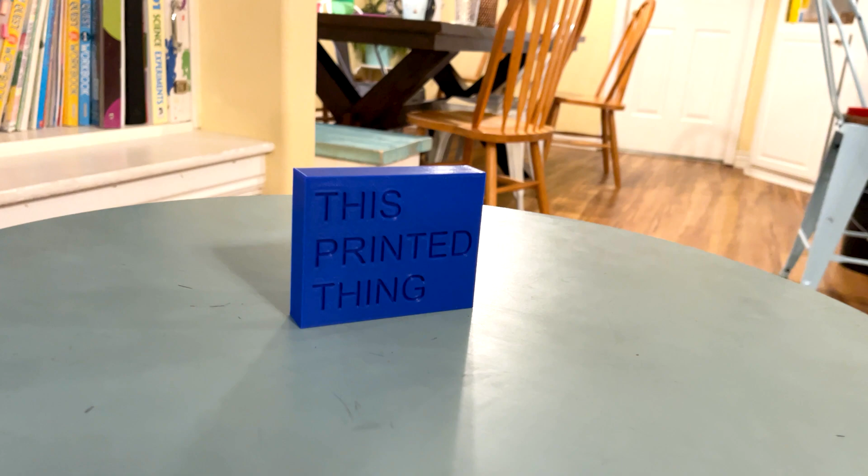Season's greetings and welcome back to This Printed Thing. My name is Mike, and my wife asked me to design something she can give to someone else as a Christmas present, specifically a sign. Now, in my religion, we have a saying: think celestial. We believe in God, we believe in a higher power, and this saying tells people to think higher thoughts, think celestial. So my wife wants me to design a sign that says think celestial with a graphic on it, but this is going to be a 3D printed sign.

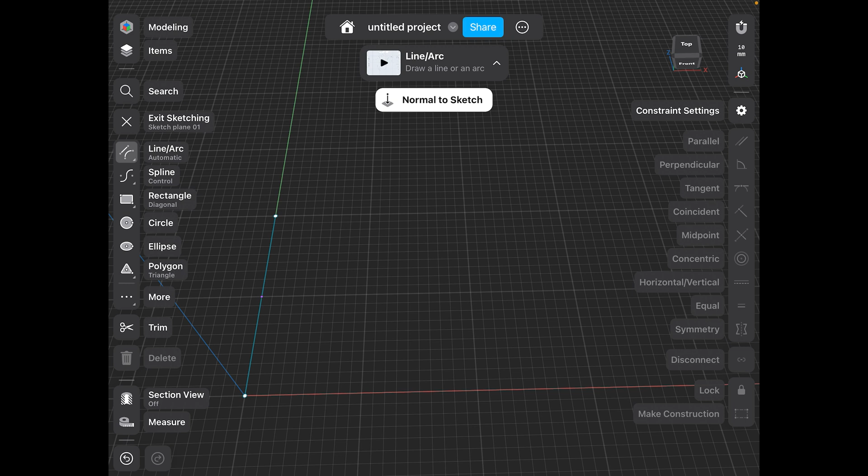So this sign is going to be, here, we're gonna make it kind of big-ish. The Bambu X1-Carbon has a 256 by 256 X and Y print bed. I'm gonna make this sign 200 millimeters high, and we're actually gonna go big—400 millimeters long. So this sign is gonna be printed in pieces.

And here we go. And then close it off. There, so we have the basic part of the backing of the sign.

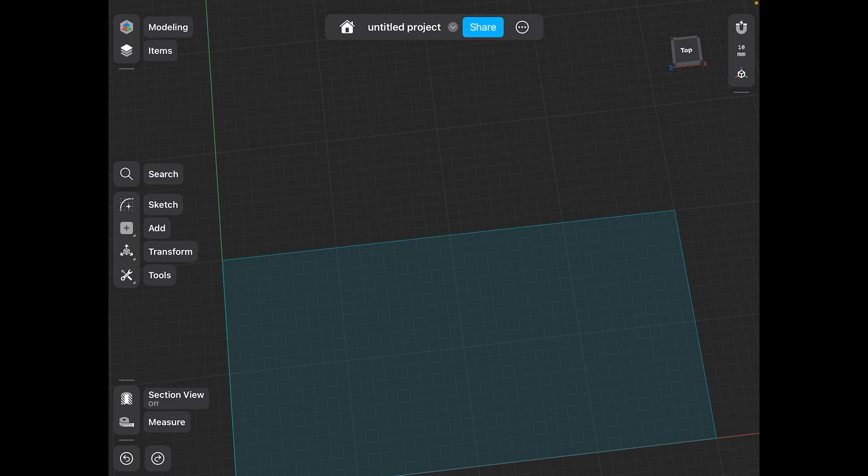We're going to be adding a graphic. It'll be a sun with rays of light coming off the top of it, and it's going to be at the top here. So what I want to do, I'm going to go from my right corner here.

Just so that I have another point of reference, I'm going to draw a 50 millimeter line back towards the center, and do the same thing here. So now I can just draw a circle. So now this is really going to be the basic shape of the sign.

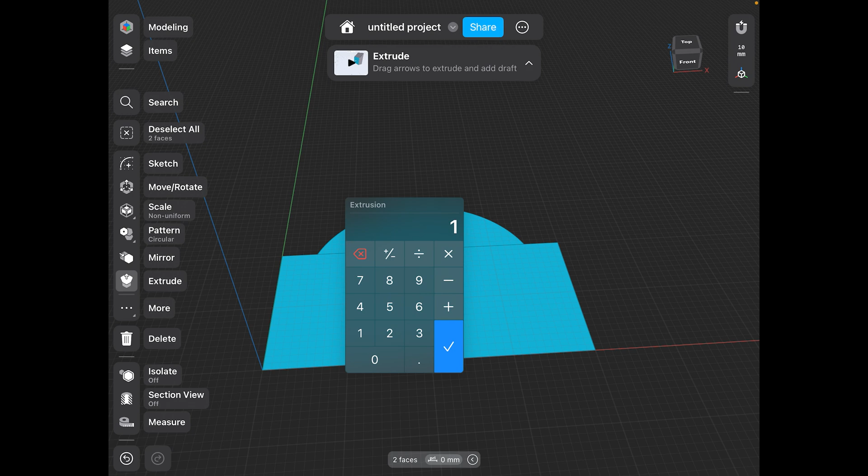And so I'm going to tap that. Now we can tap this up and down arrow and make it 10 millimeters, or 1 centimeter, thick.

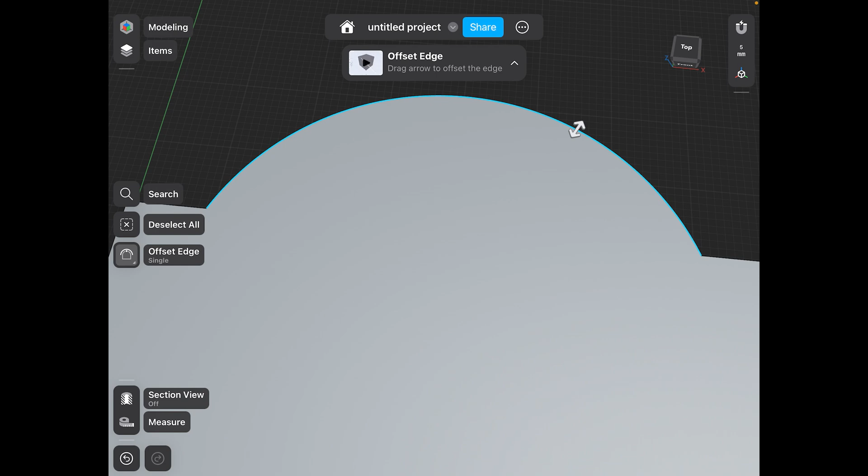Now, nothing is going to be going all the way to the border of the sign. I'd like to keep things about 1 centimeter away from the border, so I'm going to tap the border and come over here to the left side and select offset edge. We'll do 10 millimeters, or 1 centimeter. So we're not going to have anything go past that line as far as up towards the border, because we're going to have our sun, and it's going to radiate light out the top of it, and those rays are going to stay about 1 centimeter from the border.

Now, to be certain that this line doesn't move, let's lock it in place. So I'm going to select it. We're going to lock it down at the bottom right.

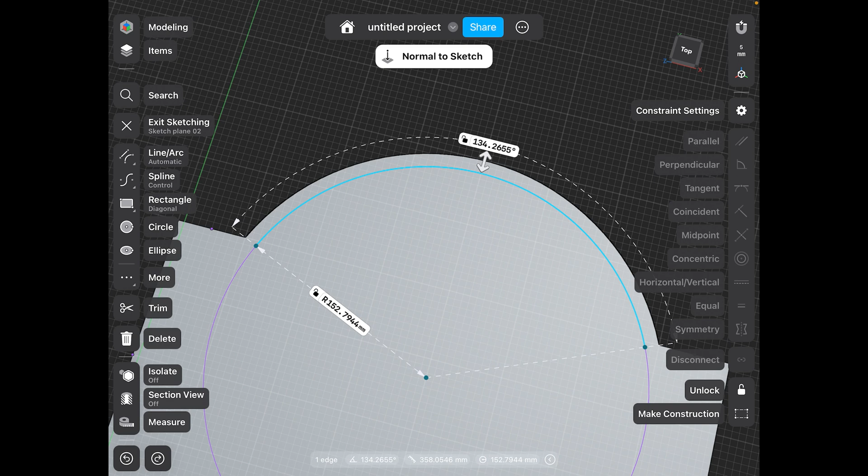All right, so now we're gonna make the top of our sun. We're gonna do another offset edge from this line here. This time we're gonna have to kind of search for the tool, so more, offset edge. Let's go about, yeah, let's say about 30 millimeters.

And if we look, this point right here is going to be—if this circle were drawn all the way around—the center of the circle. So let's make a line from here, and do the same thing over on this side.

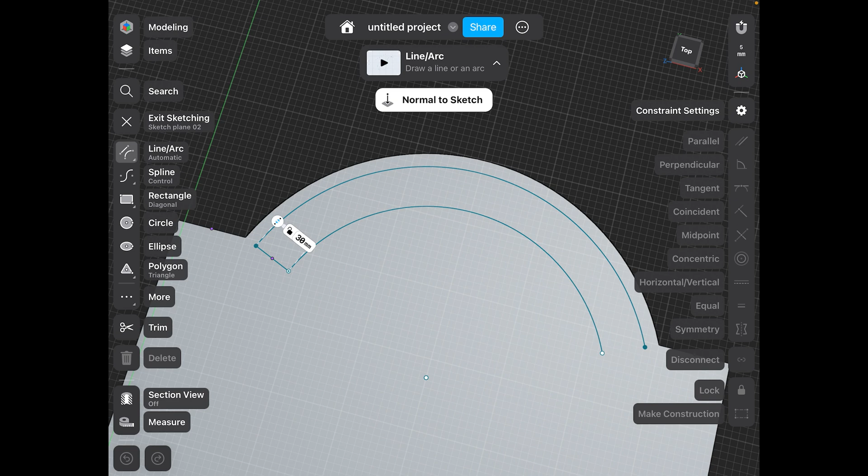So we've gotten to this point. What we want to do is take this line and copy it all the way around the top of the sun. So with this line selected, we're going to go more, pattern, and we're going to make 50 copies of it.

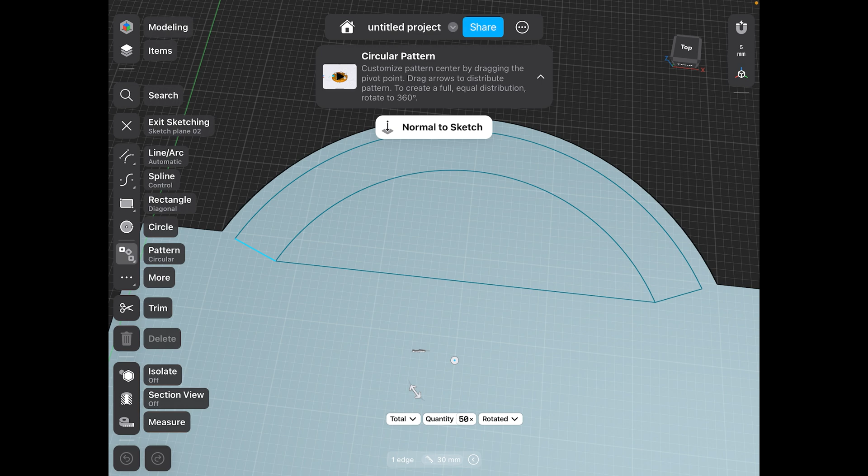So we're gonna rotate this line around, and it's gonna make copies for us, but we need to take this anchor here and move it to the center. That way, as we turn it, it's gonna turn and make copies all the way around, using that as an anchor. You'll see. So we're going to go like this.

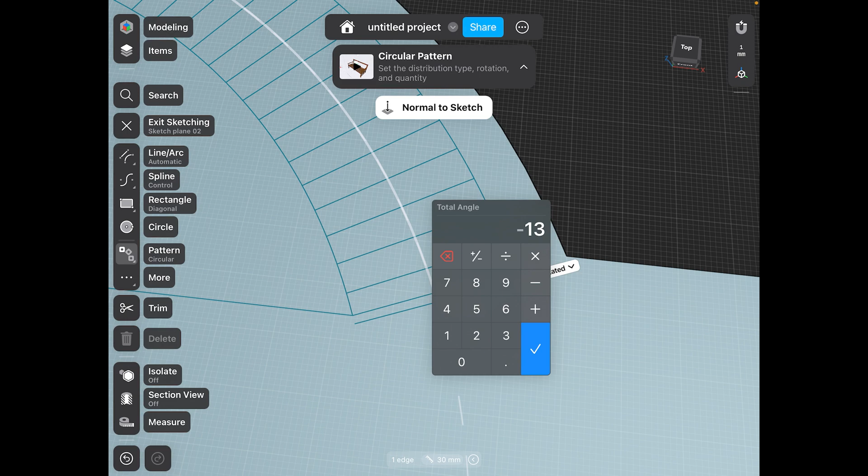Now this is not going all the way, or it's going too far. So we're gonna come here and we kind of have to guess at this. It's gonna be like 134.2-ish. Yeah, see, we're close enough. We're not gonna be able to get it exact without doing some heavy math. And when we print this, to the naked eye, somebody, when it's on the wall, is not going to be able to see that we didn't get it all the way perfect.

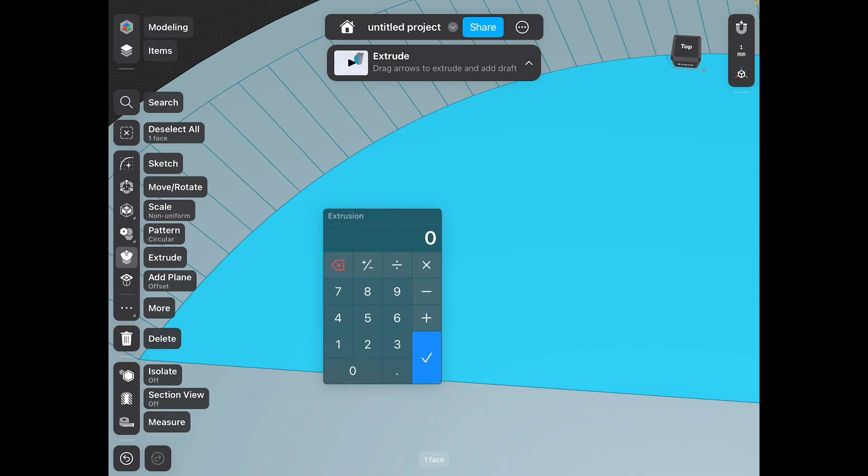So now we're going to choose our rays that we're going to raise. That sounds weird, but we're going to take these rays of light, and choose which ones to raise, because what we're going to do, like this, is going to be raised 5 millimeters. That's our sun. I did that by tapping this up and down arrow here, and I chose 5 millimeters. So I'm gonna go make these rays extrude upward, and I'm gonna leave 3 spaces between them. You'll see why.

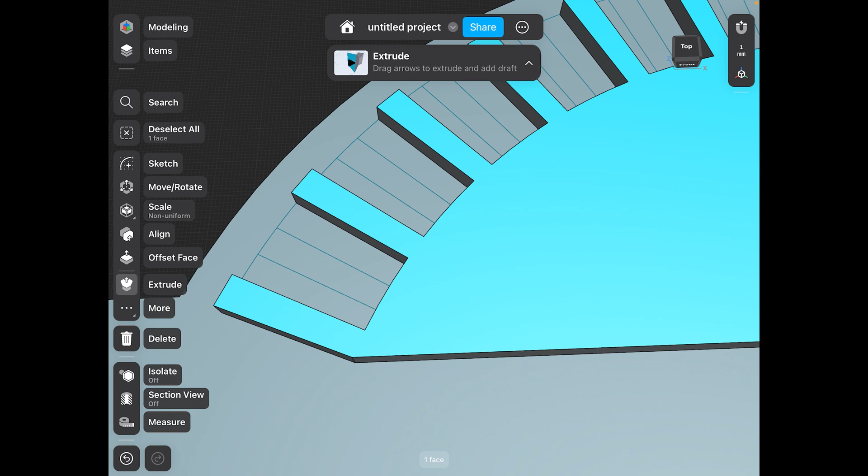So I've selected all the rays I'm going to extrude upward. Now I'm going to select this arrow here and extrude them up 5 millimeters. There you go. Now the reason I left 3 spaces is because I actually want to do something in here where I make a line. Whoops, didn't mean to do that. I just want to make a line, and do this on every center space.

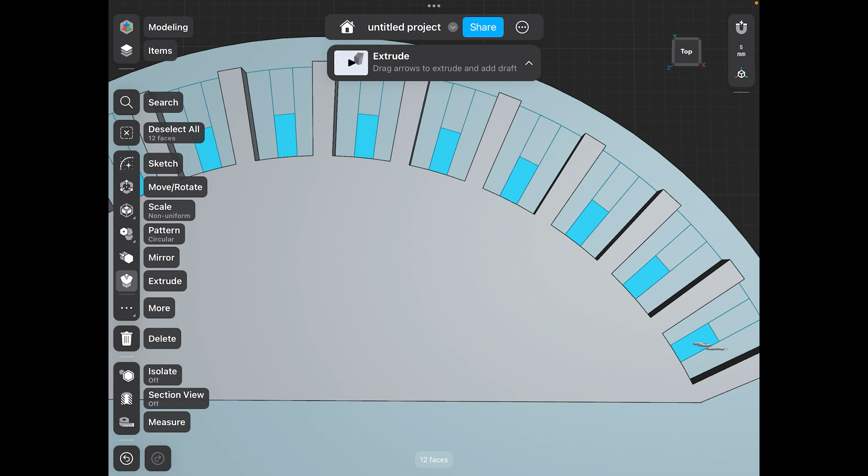Okay, so now that I've done that, I'm going to choose all of these spaces here. Oops, I didn't mean to choose a line. Just tap it and it unselects it. Now I'm going to extrude those up 5 millimeters.

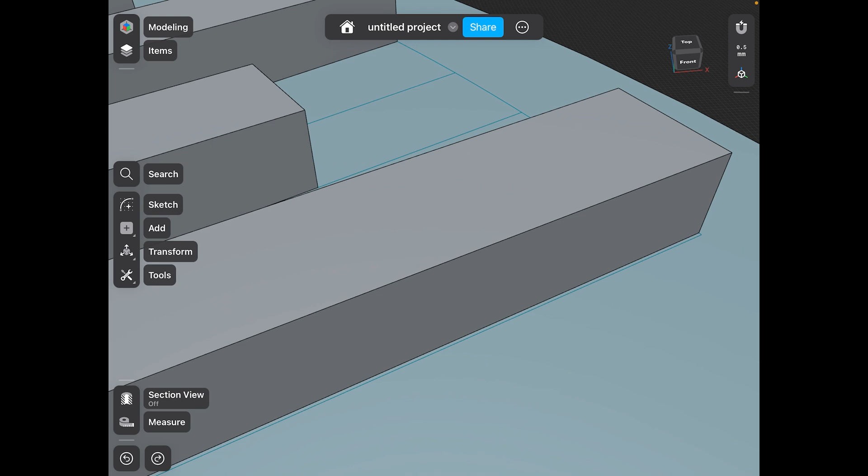So now we have our happy little sun with lots of rays of light coming off of it. If you remember this little section here where we couldn't bring this line all the way to this line, what we probably should do is go ahead and extrude this piece as well, because again, nobody's going to be able to see that we were off by a fraction of a millimeter. So we'll bring this up 5 millimeters. And now it looks pretty much exact all the way around.

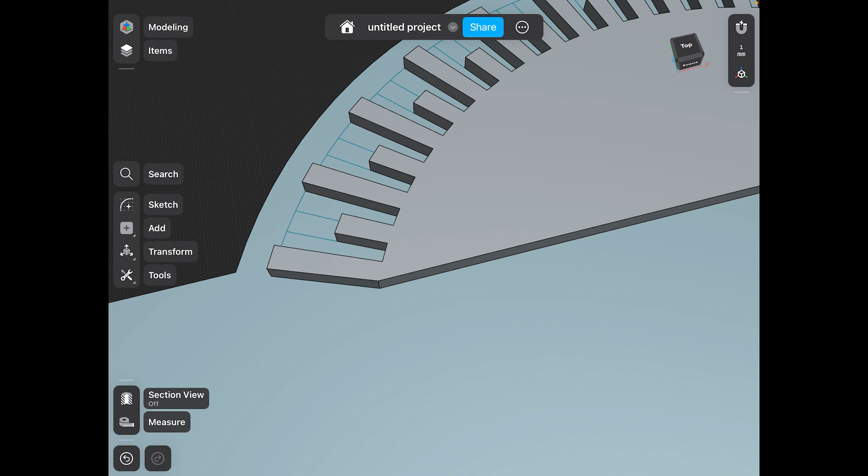So one thing I like to do with my hard edges is soften them. I like to give them what's called a fillet, where it kind of rounds the edge. So what we got to do is select all of our top edges. And this can take a minute, and you want to take your time because you don't want to select something that isn't an edge. I wish there was a way to just select the top edge all the way around. I can see why there isn't from a programming standpoint, but still.

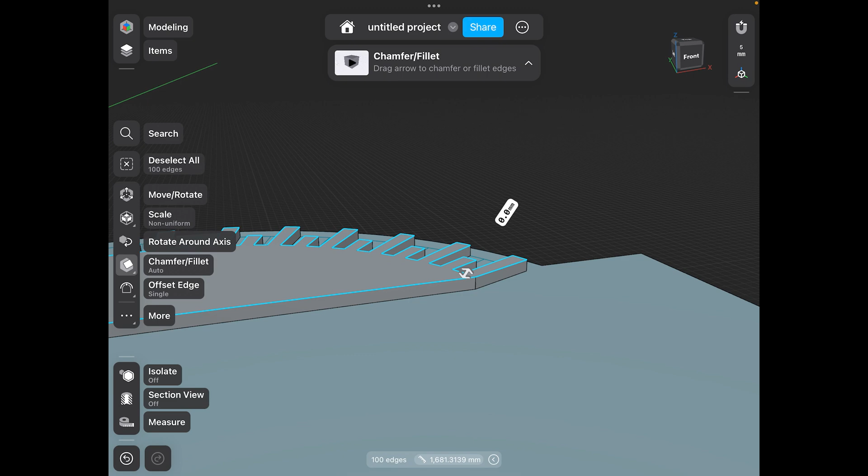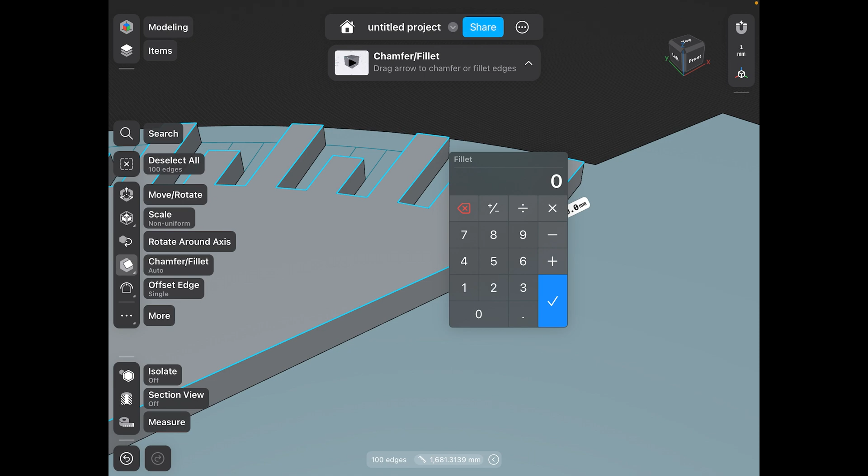So I got this edge selected all the way around the top of our sun. Now, to create a fillet, I can do one of two things. I can grab this little arrow here and pull it out, or I can just tap the arrow, and I know what I want already. I want a 1 millimeter fillet all the way around. There, kind of softens our edge a little bit.

And it's not so hard. If we wanted to, maybe we can go a little further. Let's see what we can do before the computer tells us we can't go any further. Let's try a 2 millimeter fillet. Oh, that's even better. Yeah, let's stick with that.

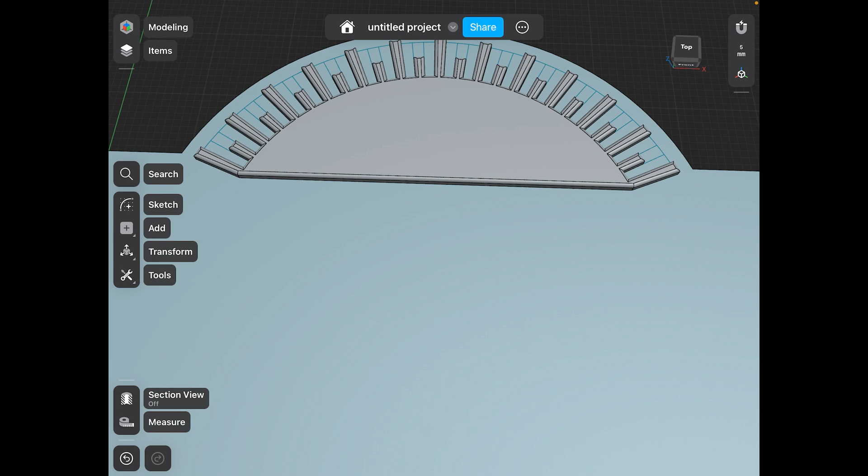So now we have our graphic. Let's add our text. What my wife wants it to say, again, is 'think celestial.' So we'll put 'think' in capitalized text, and then below it we'll put 'celestial' in a larger font, but a cursive font. That's something we're probably going to have to search for and figure out.

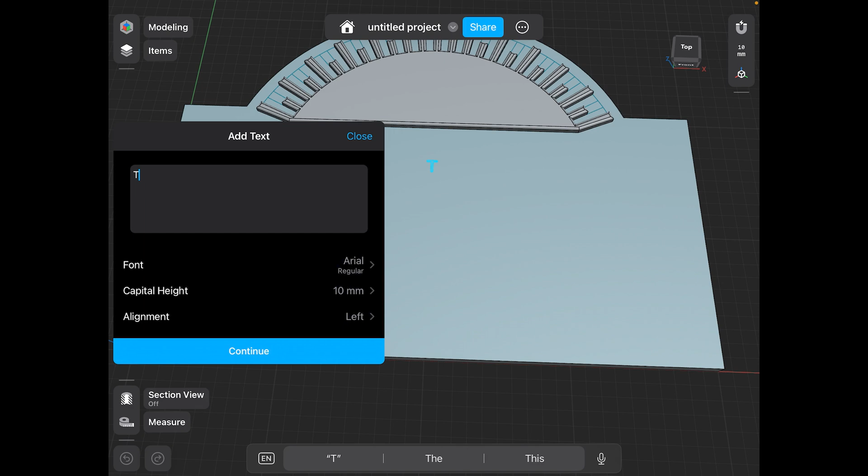But if we select our sign and go more, add text. So I happen to have a keyboard connected to my iPad. Of course, caps lock doesn't work, so I'll just have to hold down Shift. Think. And we want it bigger than that, so let's go like 30 millimeters, let's try that. Yeah, I think that'll work. And then we'll use this down arrow here to kind of pull it down to about there. And we're gonna tap done.

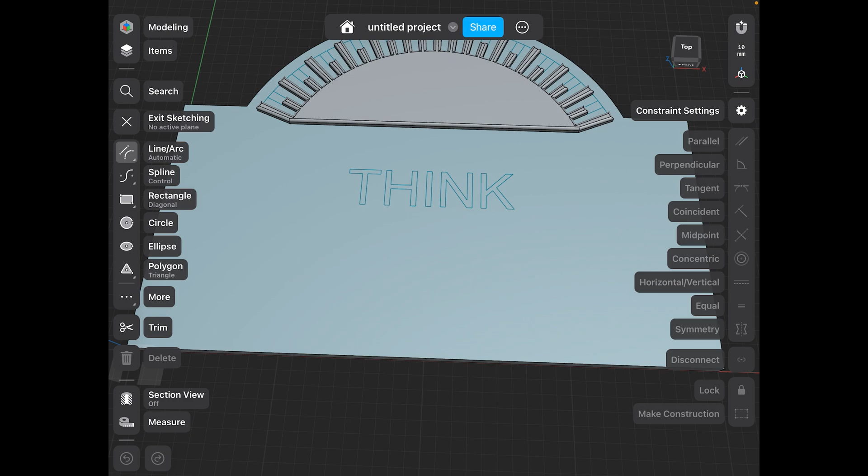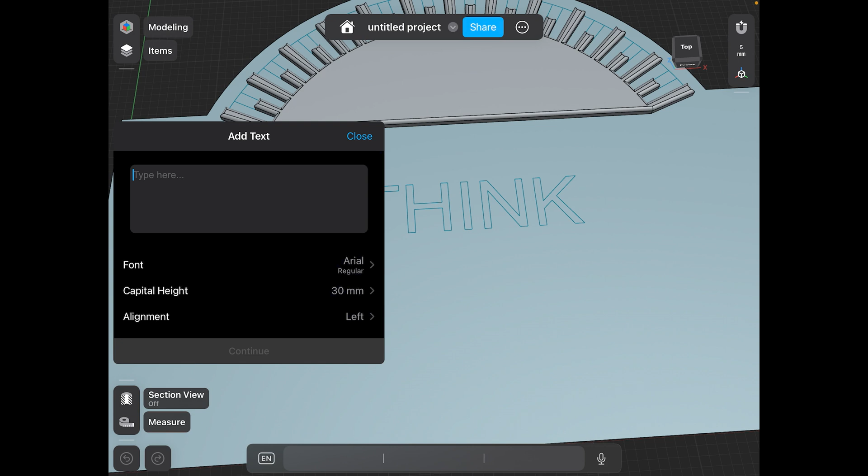Now we're gonna do the same thing and add 'celestial.' So we're gonna tap more, more. Oh, we need to have our sign selected first. So we're gonna select our sign, more, accidentally double tapped. So have the sign selected, more, add text, and now we're gonna type celestial. And my wife wants this a little bit bigger, so let's go 40.

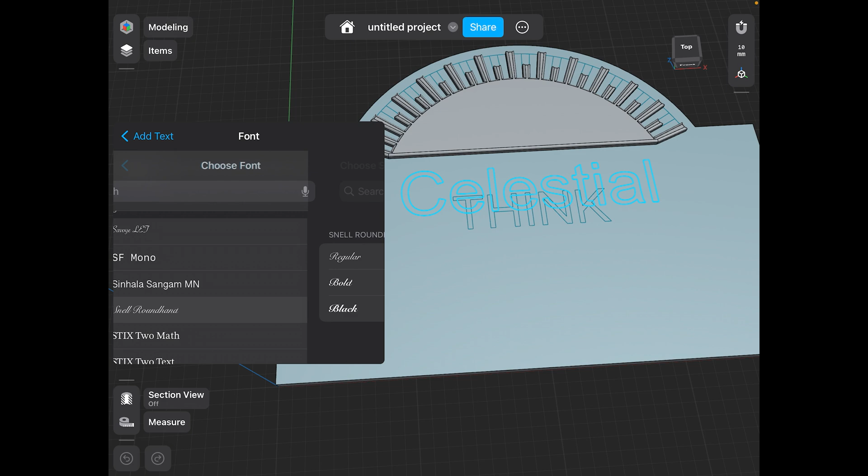And we might go even bigger than that, but let's find our actual font first. Let's try the Snell Roundhand. Now, if I were doing this on my PC, which I do have this on my PC, I could probably use more fonts that are on my PC. Let's try this. We got regular, bold, black, which I guess is just more bold. Let's try a bold.

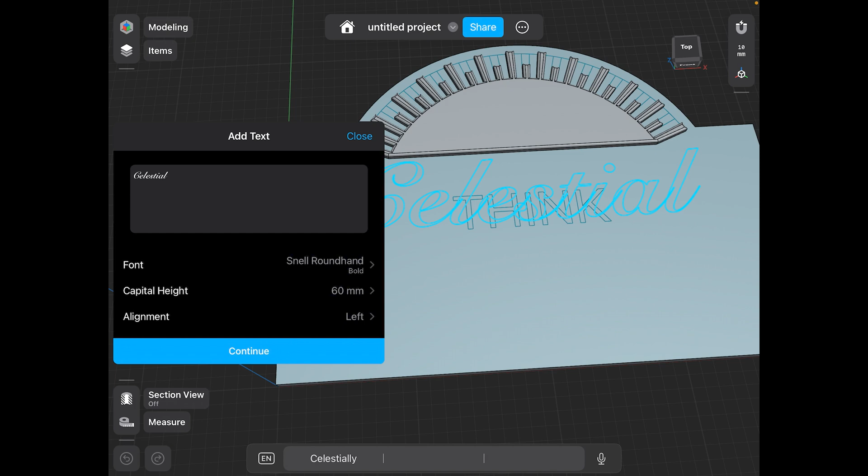And let's make it bigger. Let's go 50. Now we have to remember that we're going to be extruding this upwards as well. So let's go 60. We want to give ourselves plenty of real estate to grab and extrude upwards, and also to print, because this is going to be printed on an FDM printer. And I think that's probably going to be as big as we want it. I think going any bigger than that will just be too much.

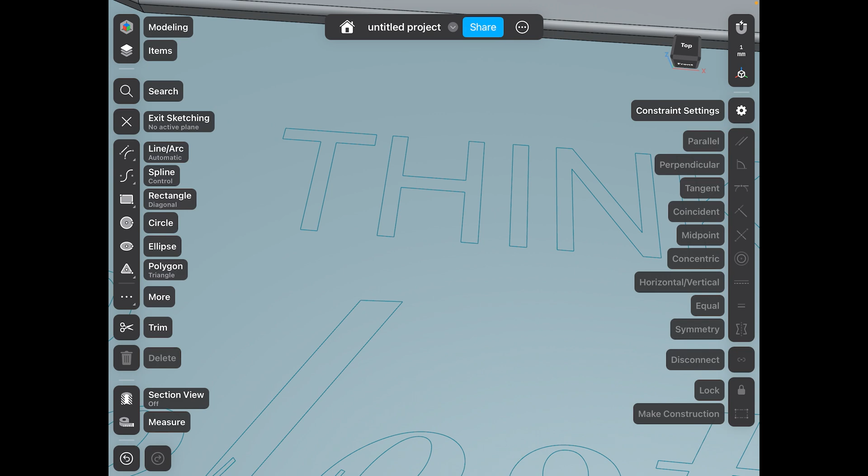So we're going to continue. And once again, we're going to drag this down about right there. Done. So what that's done is it's added our text. Now we can extrude our text upward, same thing like we did with our sun up here. So we're just going to select our faces, not lines. And we're going to go 5 millimeters.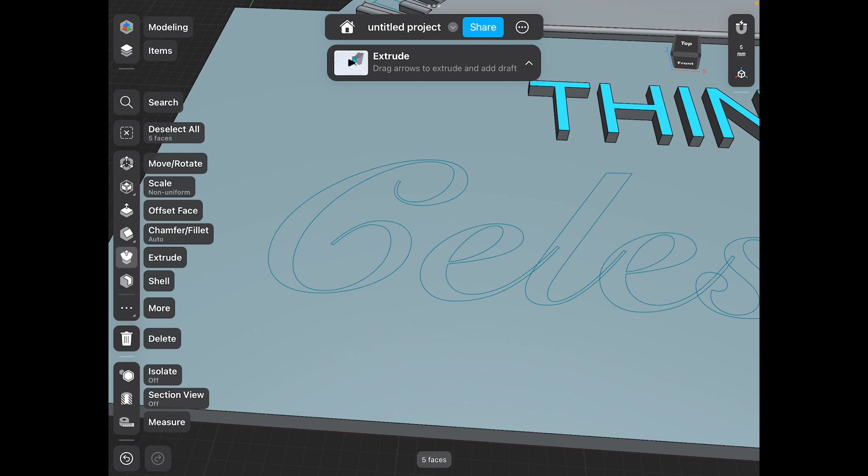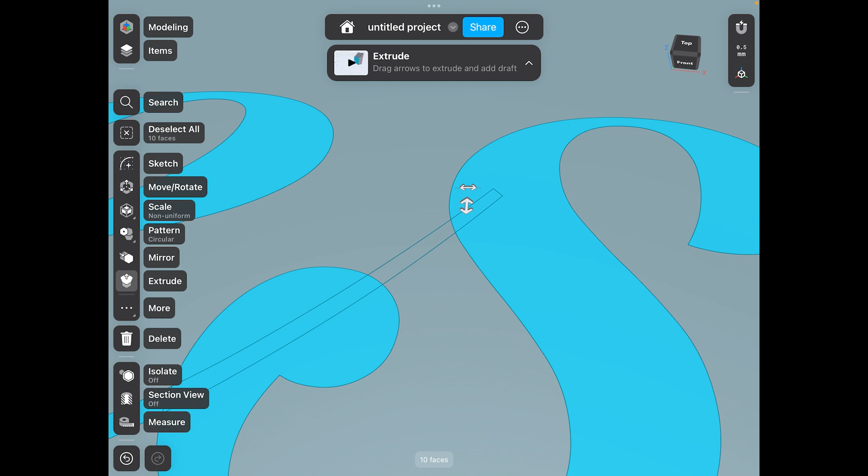Then we'll do the same thing with celestial. We're going to have to get kind of meticulous here because we've got spaces like this, not the lines. Might have to zoom in pretty far to select them. And we want to... this space here, I'm actually not going to select. So now that we have these spaces here that we're going to extrude upwards, we're going to select our arrow. We're going to go up 5 millimeters. There.

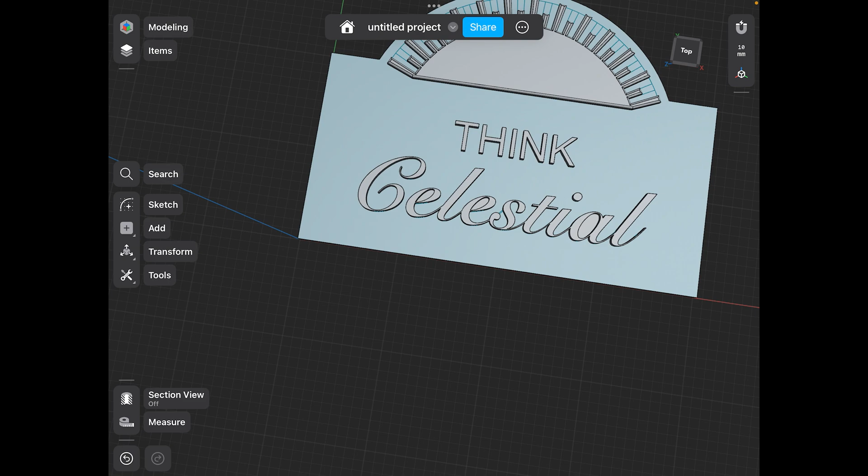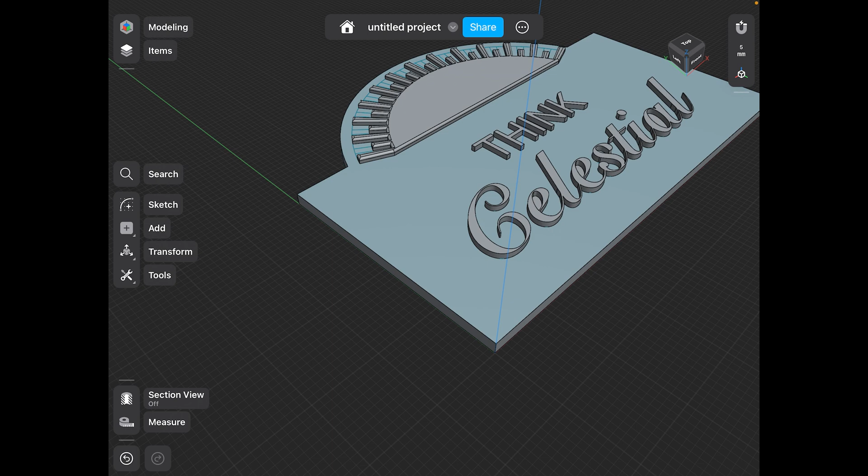So we have our sign. And what I want to do on top of this is design a border that's going to go around, because I have this Amolen wood, walnut wood filament that I think would look nice as a border. But what we're going to need to do is print that separately, because the rest of this we're going to print using the AMS of the X1C, which will automatically change the color of the filament for us as we print. But the wood filament, being an abrasive filament, can't go through the AMS, so those will have to be a single color print that we just glue onto the sides. I mean, we're going to be gluing things together anyways, because we're going to have to print this sign in pieces, because the whole thing won't fit on one print bed.

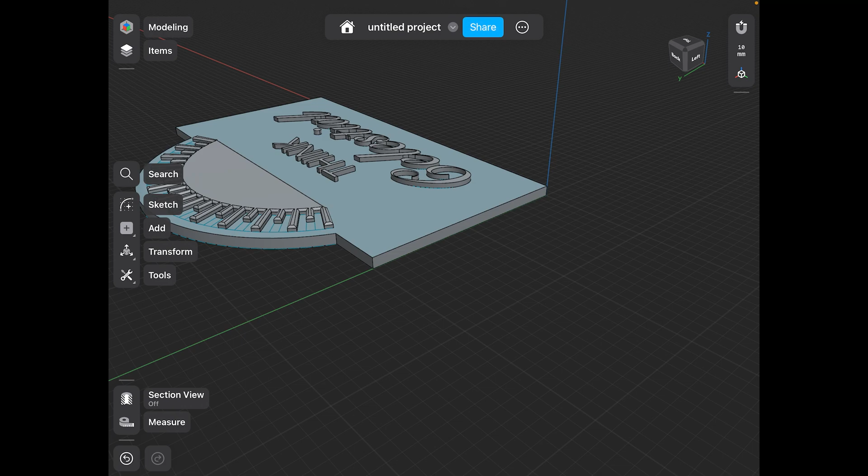So let's do that. I'm going to go from here. I'm going to select this point here and go out another centimeter, if it'll let me. Here. There we go. Whoop, no, that's not what I wanted. I want to go straight out. So we're going to go out 1 centimeter.

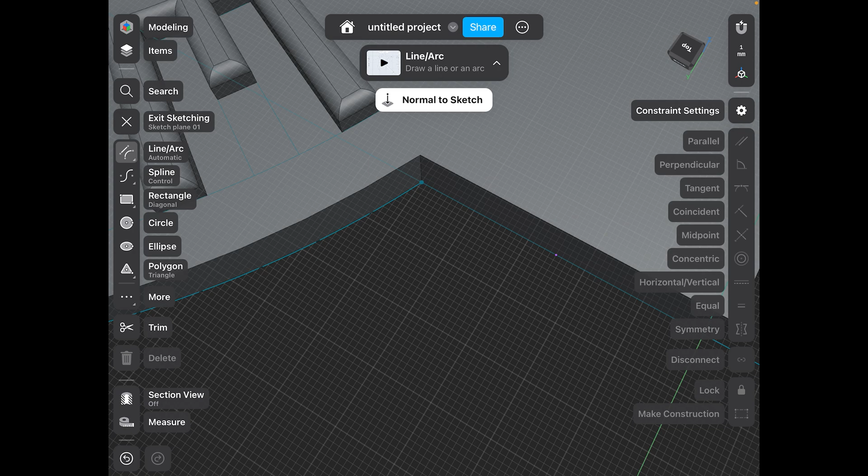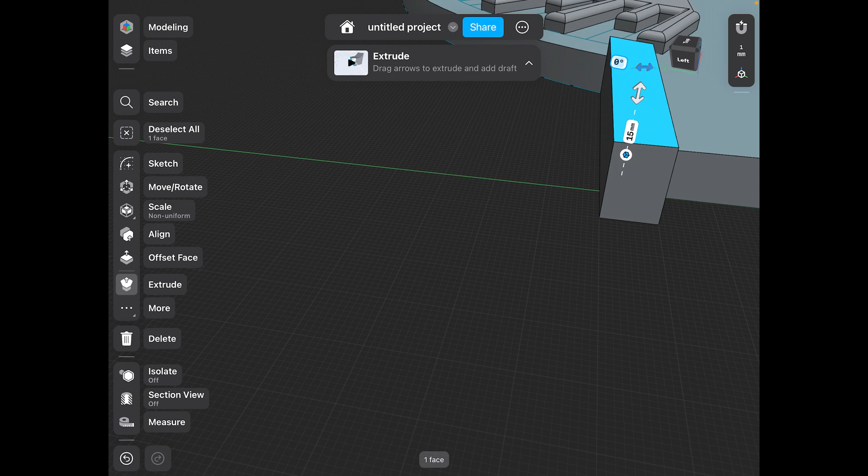The reason I'm doing it this way is because I want these top pieces to conform directly to this top of the sun. I'm actually going to not have that wooden border around the top of the sun. So we're going to have it come out, whoop, 1 centimeter, yep. And so this way I can go all the way to there. Let's see what happens if we extrude this up. We're going to go up 15 millimeters, so 1.5 centimeters, so that it comes up a little ways around the rest of the sign.

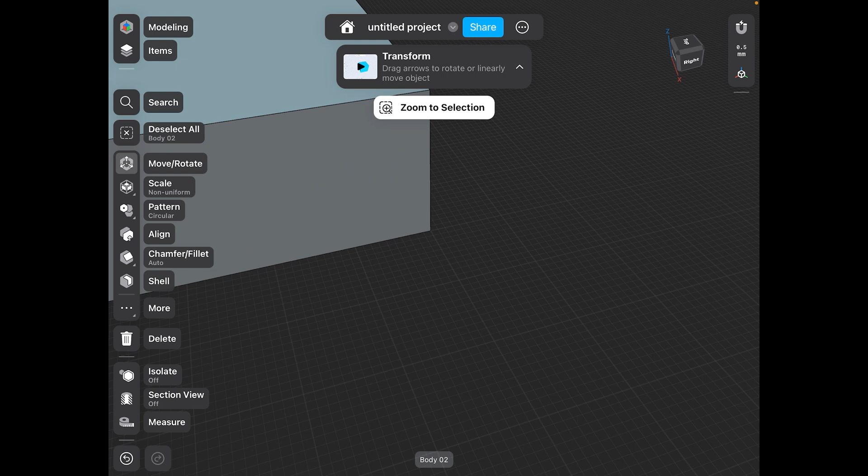And then we're going to move this out. There, so we have that piece. We're going to do the same thing over here. We're going to just drop our pencil and draw out 10 millimeters, go up 10 millimeters, and then go back in towards our sign, straight, extrude this up, whoops, 15 millimeters or 1.5 centimeters.

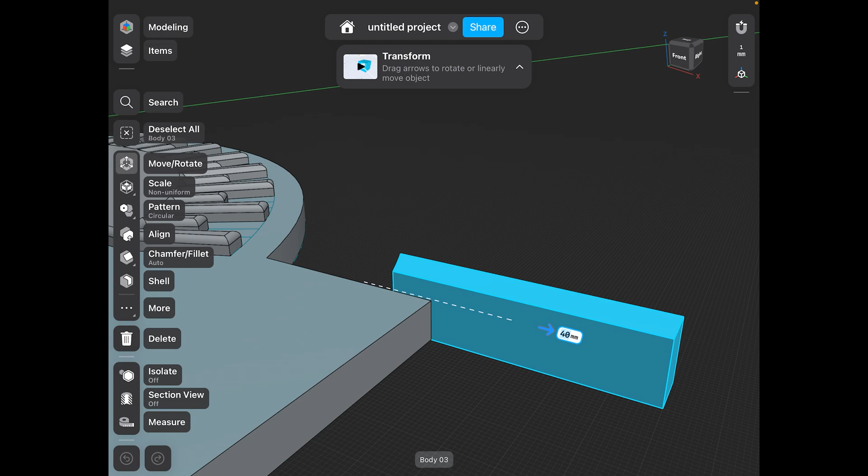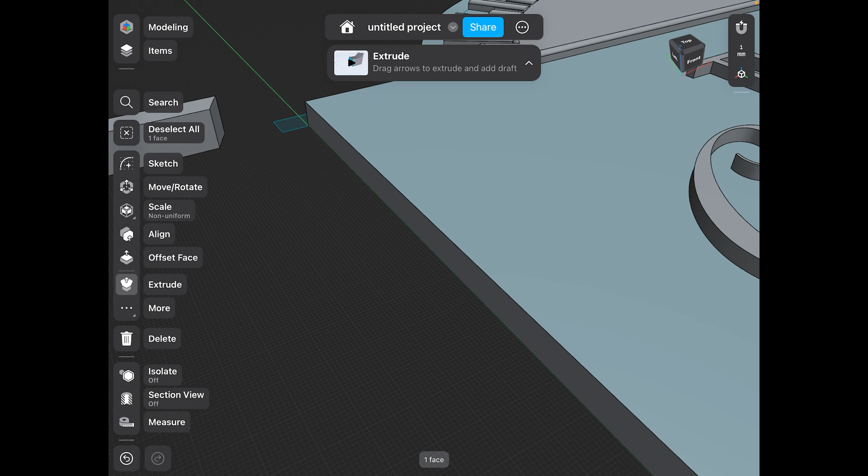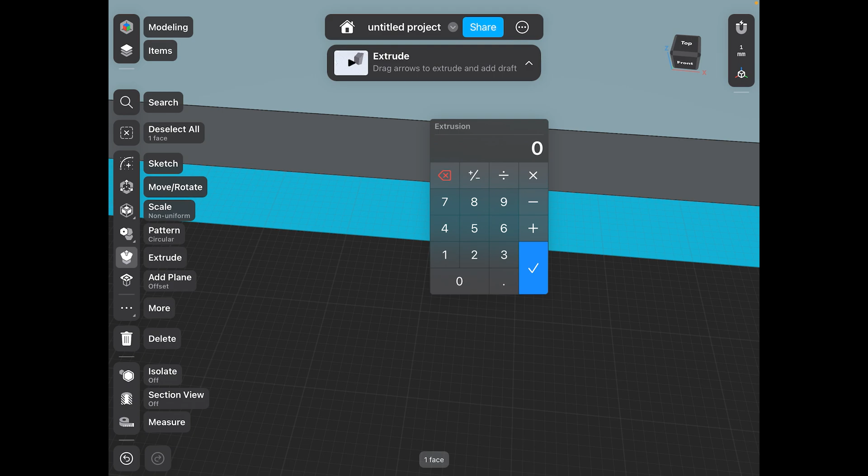We're going to double tap our part to select the whole thing and drag it out. Now, actually, what we could do is just leave it in, and then we can do the same kind of thing down here. And this will kind of make things easy. And then we already have this shape here. And here, let's do that better. 10 millimeters there. Extrude up 15 millimeters.

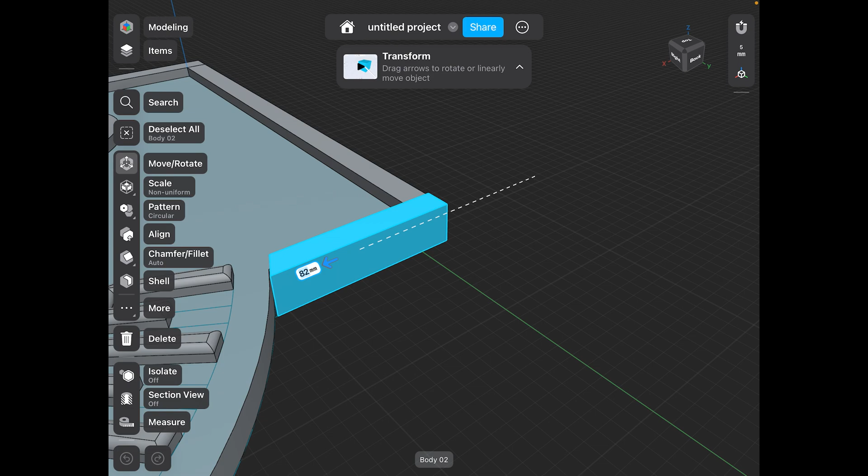Let's move this back into here. And that's not lining up perfectly because we weren't really perfect when we pulled it out. There we go. There we go. So that's our sign. And since we made these all separate pieces, these border pieces, separate, we'll print them separate as well. When we export this, it'll export it all into parts. And then we can print them all separately, except for the sign itself, which will be cut up and printed in separate pieces as well. But that's it. Let's get it printed.

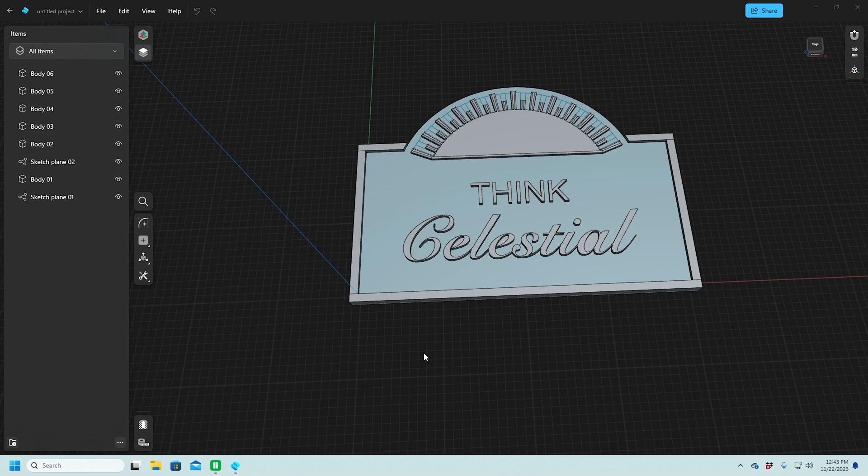So I've moved over to Shapr3D here on my PC because this is where I'm going to be doing my slicing and everything. What I'm going to do is, for my reference here, I'm going to pull these edge pieces away from the rest of the sign.

Just a little ways, just so I can see it when I pull it into the slicer and I can move things around from there.

So there we go. Now we're going to export this, and we'll just do STL, that's fine.

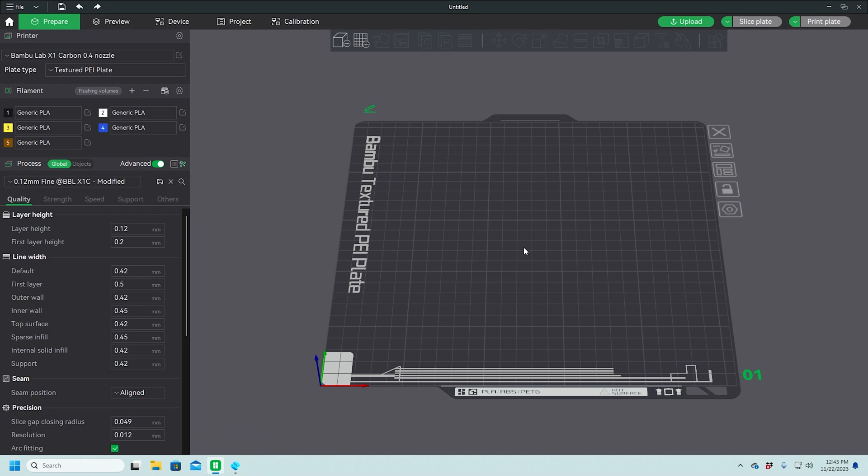Now we're going to pull it into Bambu Studio. And obviously it is way too big for the print bed, and we need to split up the pieces. So we'll right click and we'll split into objects.

Yeah, there we go. So now each piece is a separate object. And the beautiful thing about Bambu Studio is you can actually have multiple beds, so we can move all of these pieces over to a bed.

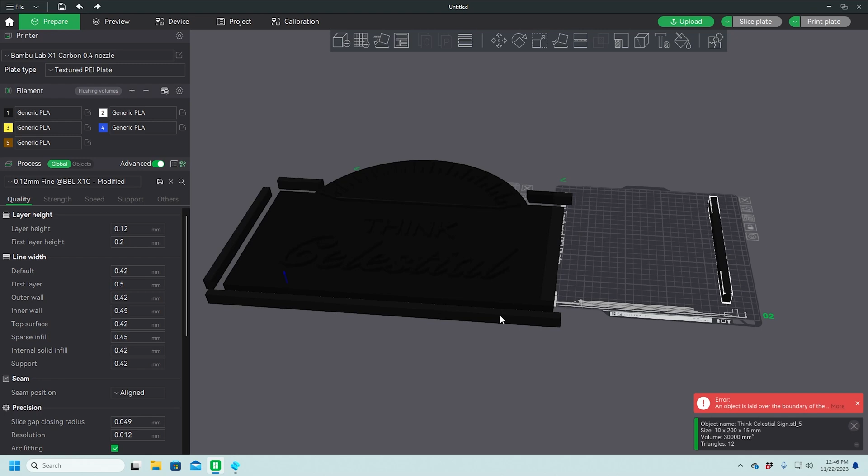Obviously, this is another one that's going to need to get cut. Then we'll make multiple beds for each piece. First things first, let's...

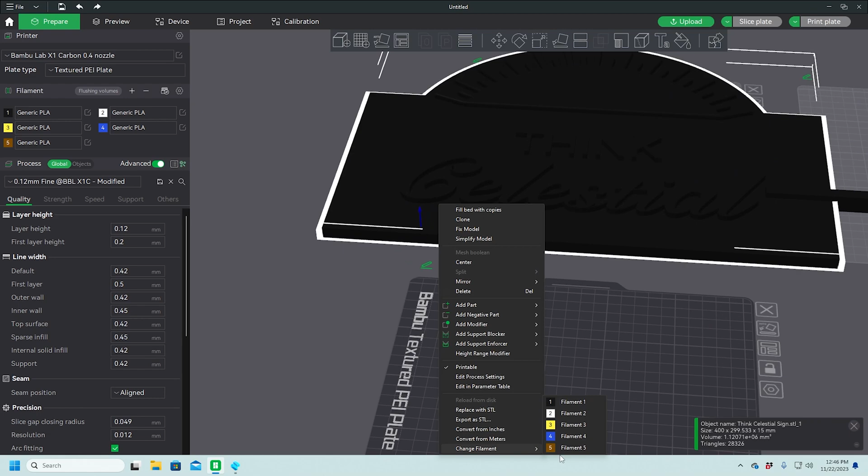Change the color for this, just so we can better see what we're dealing with. Let's move that out.

So what I think we'll do is we will cut it first, and then, or I mean, we'll color it first, and then we'll cut it.

So now let's cut this up. We're going to cut it up into 4 sections, and we'll have a separate plate for each section. So we're going to choose our sign.

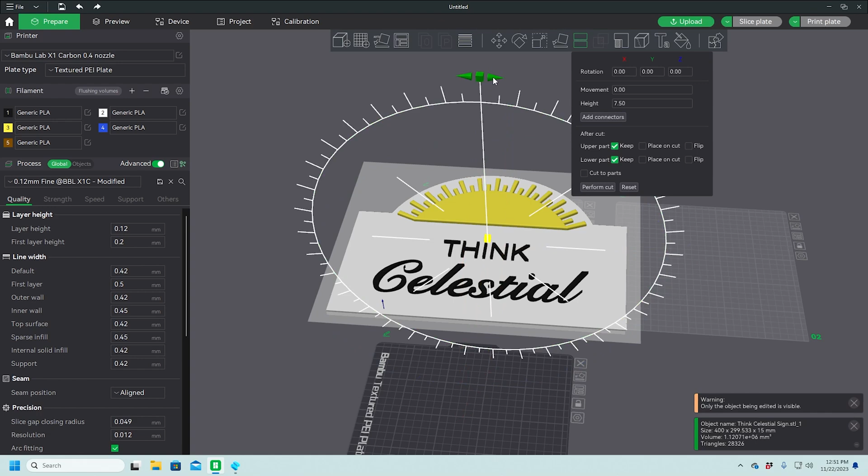We're going to go up here to cut. And no, we don't want to cut horizontally, we want to cut vertically. Oh, here we go, up here. So if we just rotate 90 degrees on the Y, so that will cut it there.

One thing I want to do is also add the pegs between the pieces, the pegs and the holes. So we're going to add connectors, plug, square, that's all fine.

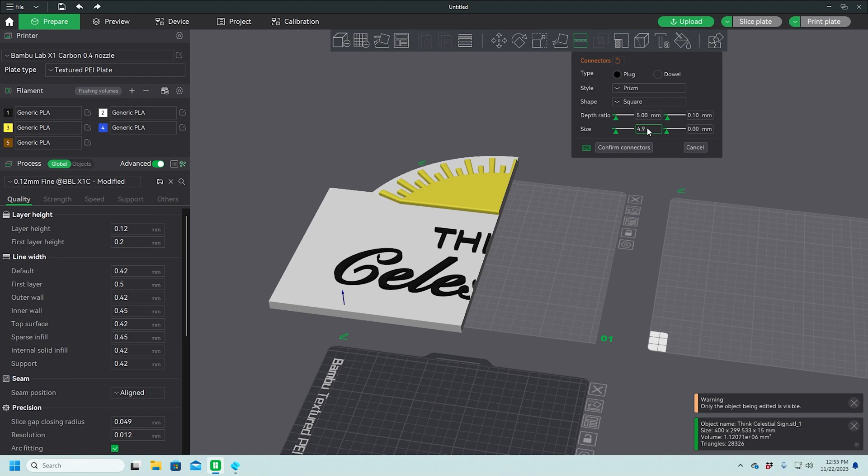And then, let's see, we'll probably want to go like 4.9 on the size. I've never actually used this tool before in Bambu Studio, so hopefully this will give us what we want.

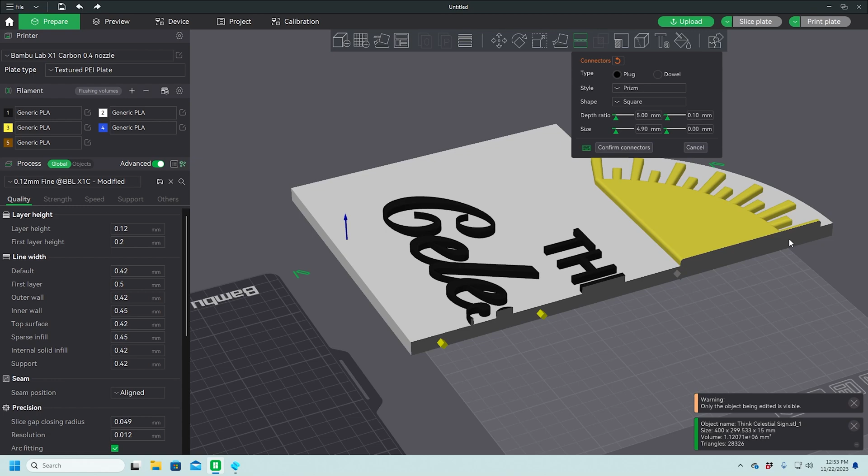And so then we will put our pegs here on. We're going to want to do 4 sets of pegs, so we'll do it like, because we're going to also cut it this way, lengthwise. So we'll do it like this-ish. There we go.

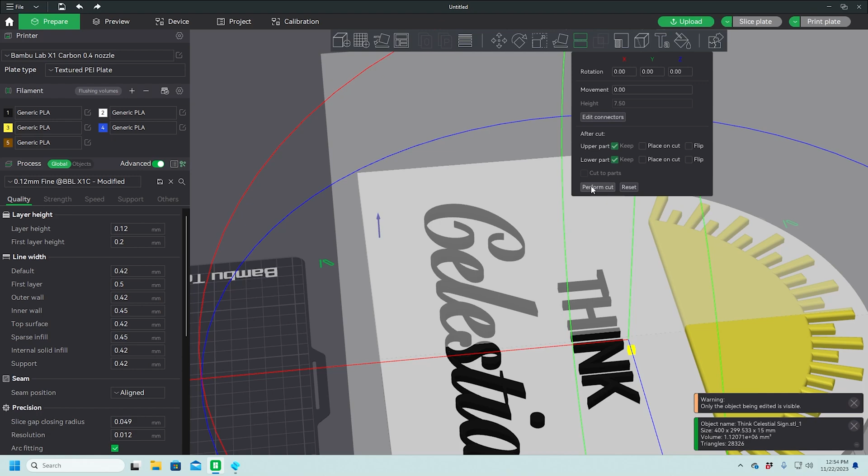So confirm our connectors, and then we'll perform the cut. And you know what it did? It killed our coloring. Dang it.

So we'll just have to recolor things. It's no big deal. And we're going to have to use a different tool to color things as well, because we've got these sides here that we want to keep white. But I'll show you that in a moment.

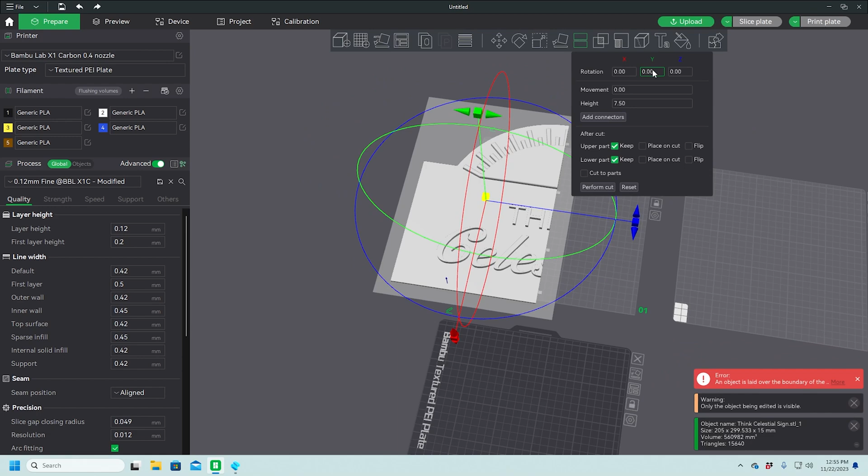So let's go ahead and cut this one now. We're going to cut, and we're going to rotate this 90 degrees, and then we're going to rotate the Z 90 degrees, and we're going to cut it lengthwise like that.

And this is why we did 4 pegs, 2 pegs for each section. This is actually going to work out in our favor, because what's going to happen is when it does the color change on each of these pieces, it'll only have to do 1 color change - 1 from white to black on this piece, 1 from white to yellow on this piece, and the same thing with the other side as well.

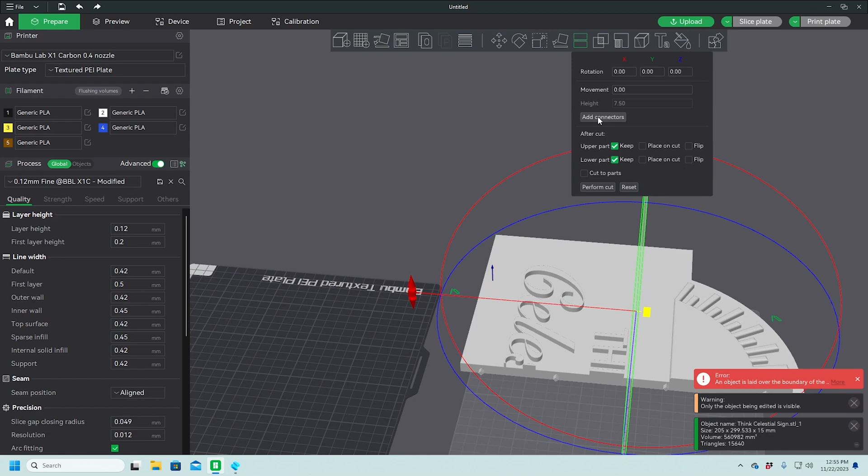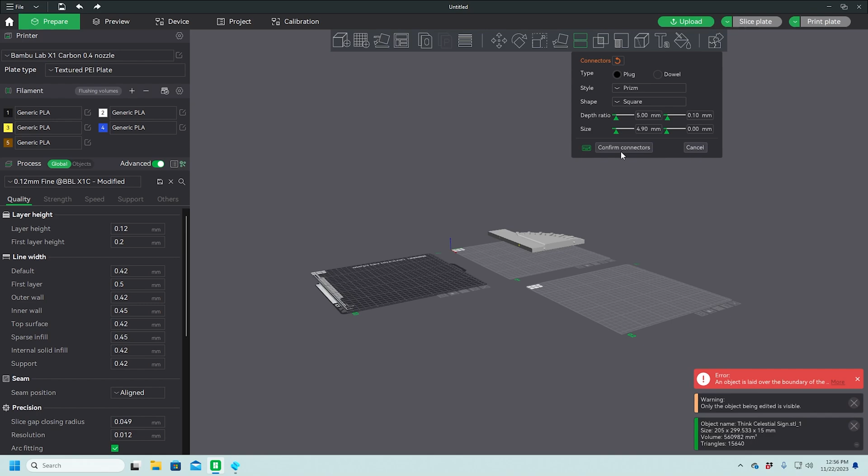So we're going to want to add our connectors, same way here. We'll do 1 there and 1 there. That should work. Confirm, perform the cut. Okay, let's move this over here.

Let's move this down to here. So now we're getting a separate plate for each of our pieces. And then we'll do the same thing, we'll cut this here.

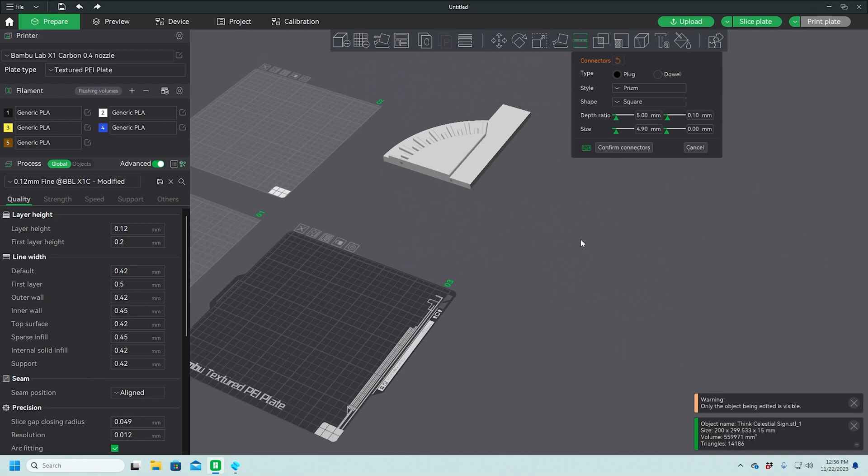On the Y, 90 on the Z, and we're going to add connectors. Do it like this. Confirm.

And perform the cut. There we go. So let's make a plate for that. Let's make another plate for that.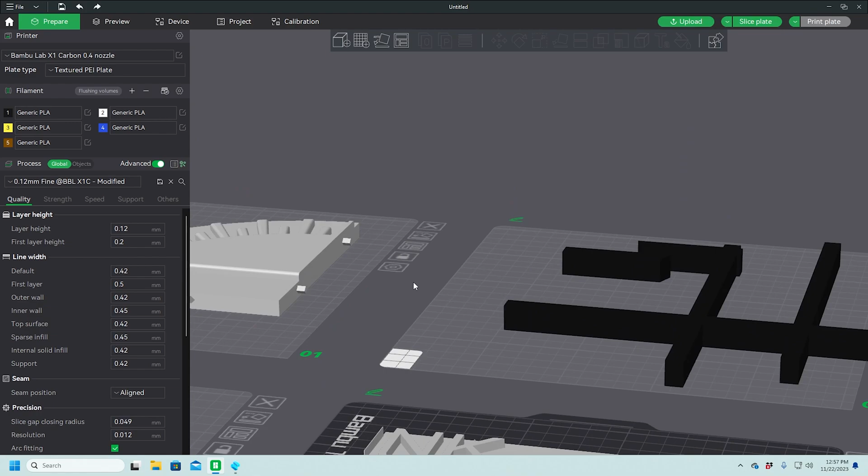And when we print these pieces that have the pegs, obviously we're going to want to give them some support. So we'll do that momentarily. Let's go ahead and cut this piece too, since we got it on its own plate.

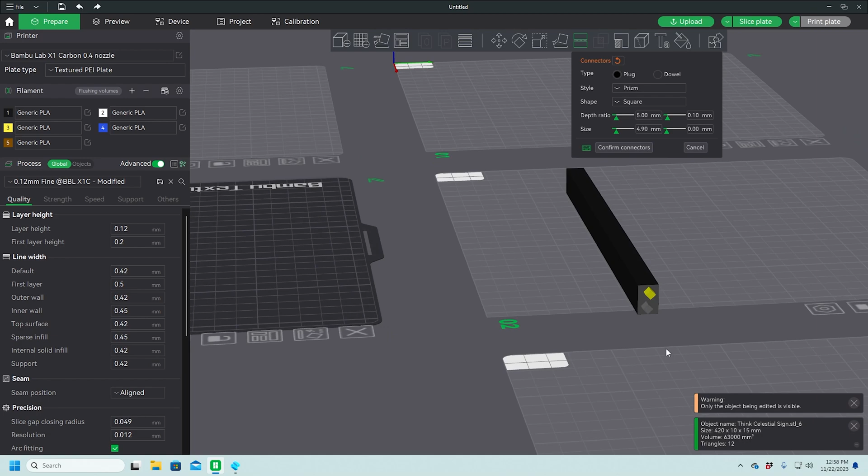Do it like this, and might as well give it some connectors too. Let's give it 2 connectors as well - just helps to line things up perfectly. So I'll do one like that. And it doesn't matter where they go, really. Perform the cut. There.

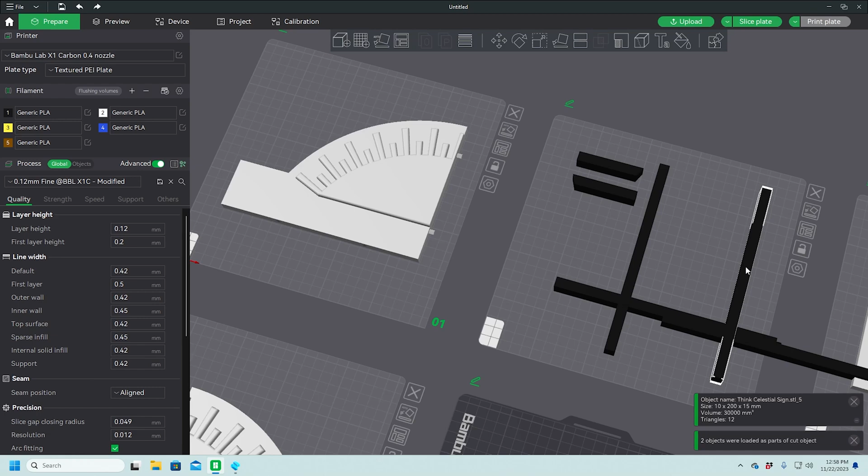And now we can arrange these on the bed in such a way that they will print properly. In fact, if we just go arrange like that, and there you go. So now we have everything done.

Let's come back in here and let's paint. So we can't just paint this yellow because it's going to leave this side white. What we need to do now is use the height range tool, go yellow, and this will allow us to go like this.

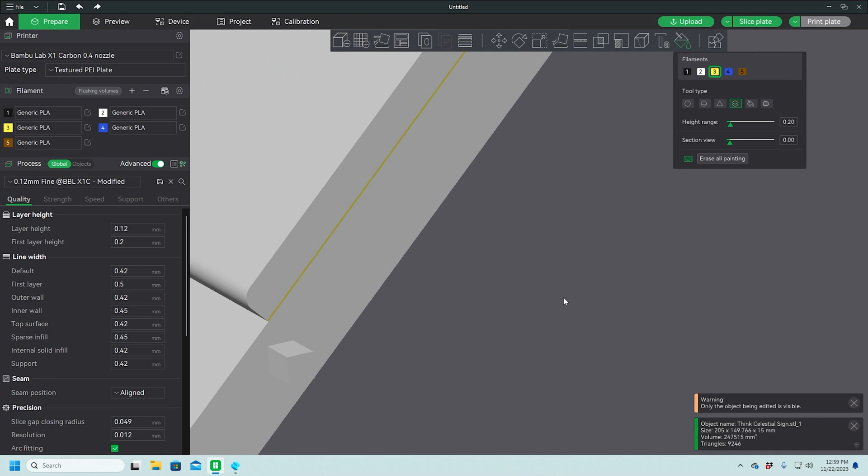So we painted that line there. And now we can just do our fill. I'm going to slide this all the way up so that I can just select this whole thing yellow. We'll want to do the same thing over here.

And this is obviously going to take some time to print, but we can at least get it all done this way and then save our file.

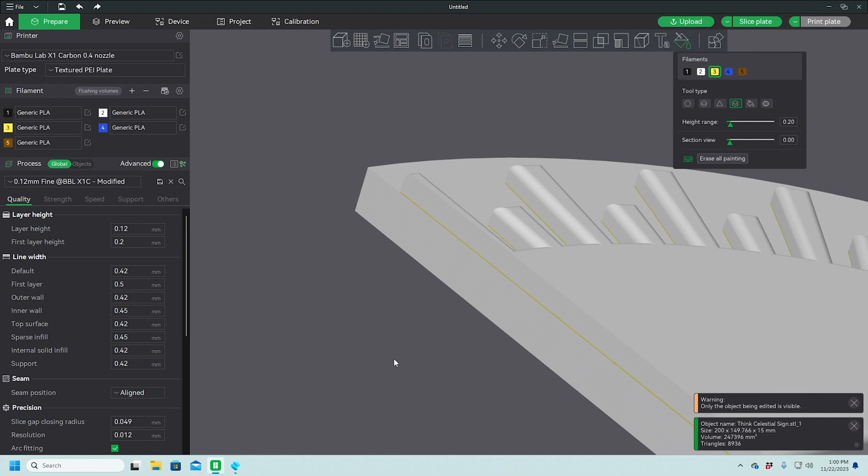There we go. Now we're going to do a similar thing with our text pieces. Black. Let's get a little closer so we can see what we're doing.

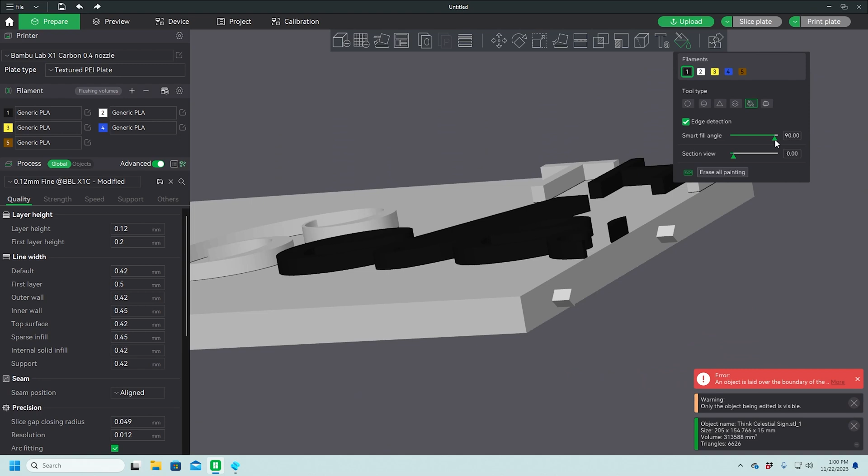The reason I slid this all the way up is so that it would ignore these hard edges and just paint the whole thing black without me having to go around to all the sides and paint them. So now we're going to paint this one and do it the same way.

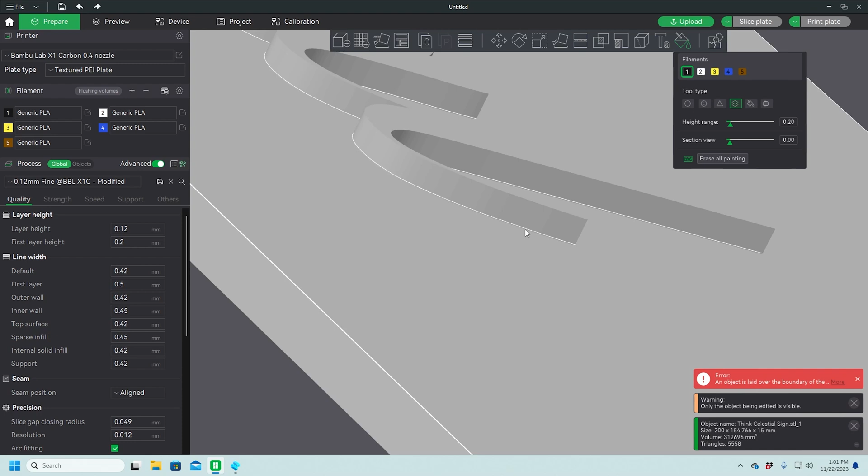There. I think that's probably going to be the best we can do. And then, this is going to get a little bit dicey, but we probably should have cut that a different way, but we'll see how it goes. But there, we have all of our pieces.

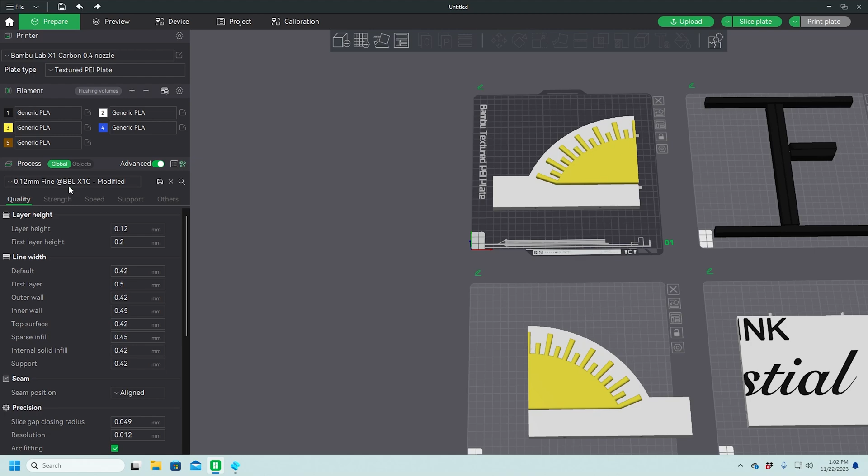Let's get the first one printing. So we'll take this one, and I actually have two machines, two Bambu X1-Carbons. One's called Alpha, one's called Bravo. We're going to print this one on Alpha.

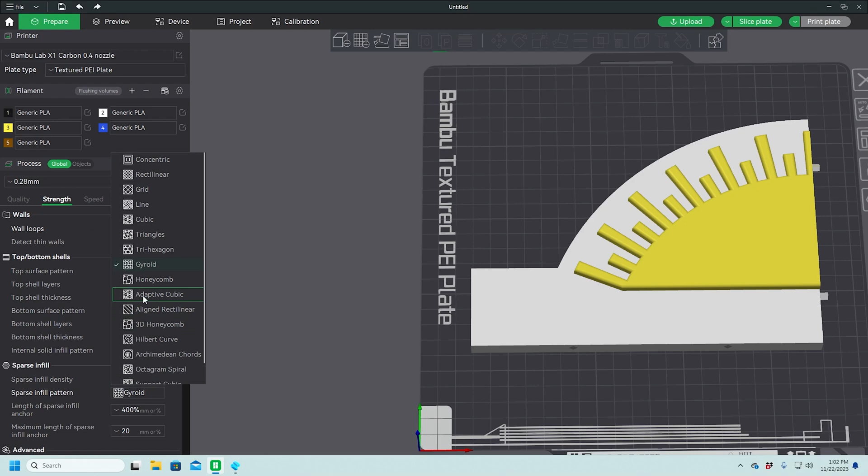Layer height, first of all we're going to go with a textured PEI sheet. Layer height, I'm thinking we're going to go with 0.28 millimeters. Infill, I like to use, let's go to infill here. I like to use, for bigger prints, adaptive cubic, and you'll see why maybe in just a minute.

We are going to want support on this piece, so we'll do enable support. I like to use tree support. With such small pieces, it might not make a difference, but we'll see what it does.

Flushing volumes, I just do an auto calc with a multiplier of 1.3. That's always given me the best result, but at the same time it wants to flush more than 800 on some of these colors. Now granted, these colors aren't going to be used, but it does waste a little bit more, but it also gives you a better result because you're not getting any bleed from one color to the next.

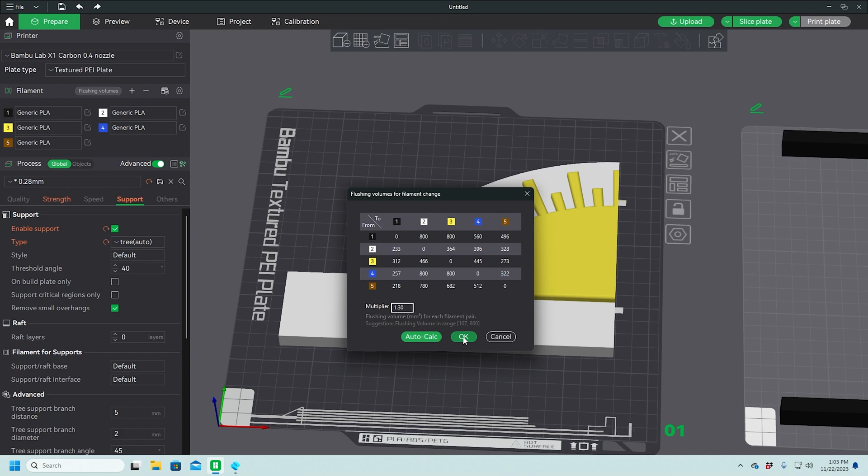And I like, when I do multiple colors, to do a prime tower, just because that primes the nozzle between the color changes before it starts going back to the print. So that should do it.

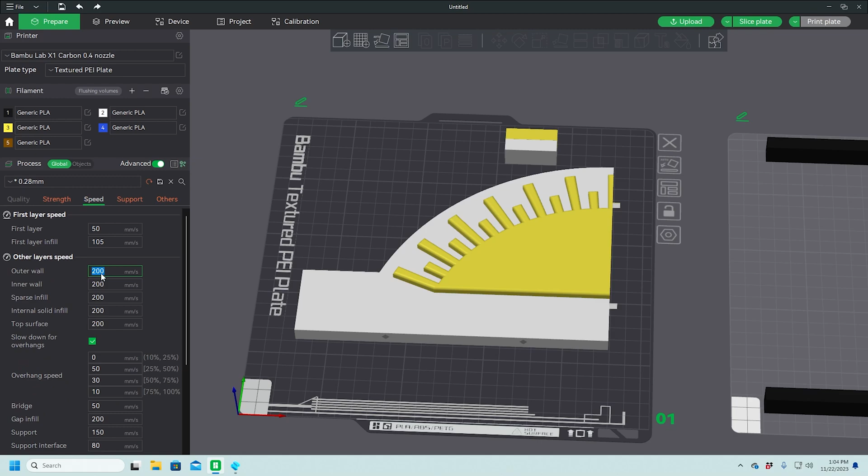I'm going to dumb down the speed as well on the outer wall. A faster speed will give you more of a dull finish. I'd like it to be a little shiny, as the filament should be allowed to make it.

So let's go ahead and slice this. This is going to take a couple hours to do, but let's get it printing. Oh, before I print, let me show you the infill here.

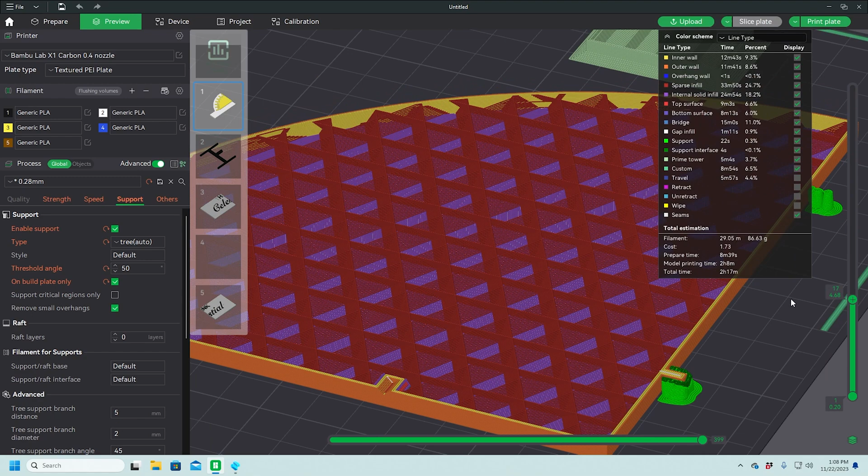So this is what the adaptive cubic does. It actually adapts the infill to use less filament. So even though it's set to 15% on our sparse infill density, it's going to use less than what I would usually use, which is the gyroid. I just like to use this for bigger prints. So let's print it.

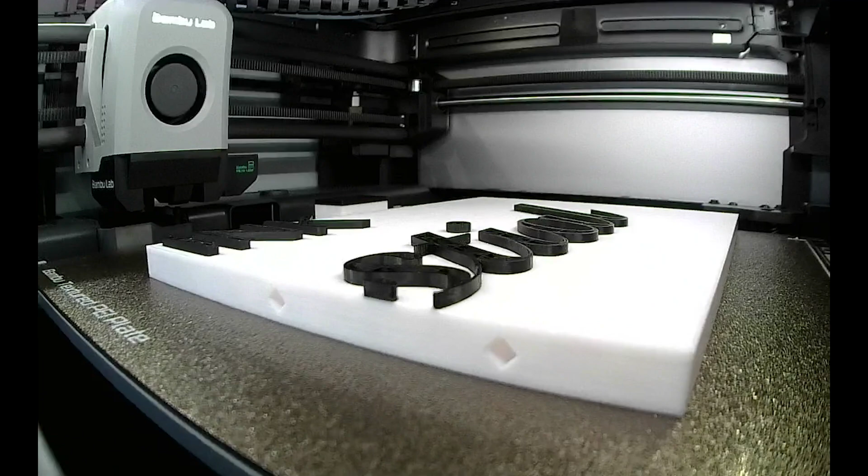So here we have it, a sign that we designed in Shapr3D. I spared you the long boringness of watching me glue it all together, just the border, gluing on the borders and gluing the individual pieces together. And it turned out great.

Now, if I were to do this again, and let's face it, I'm gonna do it again, there are some things I would do differently. For starters, I showed you that I used the adaptive cubic infill, and you might not be able to see it on camera, but what it does is it allows us to see through the surface of the print and into the infill. The infill blocks some light shining through it, but not all, and it makes it look a little bit cheesy. So I would go back to using the gyroid infill.

Second, on the pegs between the pieces, I would increase the tolerance from 0.1 to maybe 0.2 or higher. I'm really just kind of playing with that for the first time in Bambu Studio. When I went to glue these 4 pieces together, the hole tolerance was a little bit tight. I ended up having to file down the connectors just to fit them in the holes.